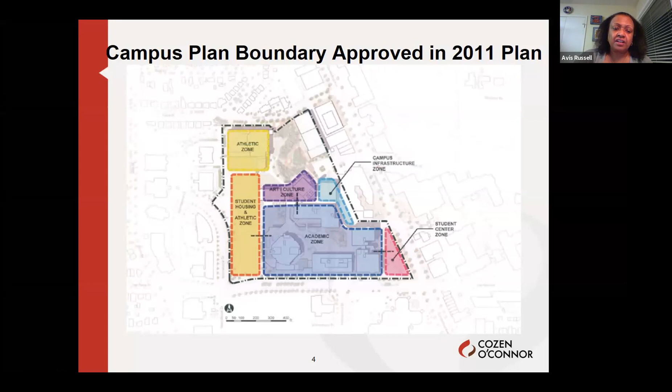So these are the campus boundaries that were approved in the 2011 plan. And this slide represents the different zones on the campus. Next slide, please.

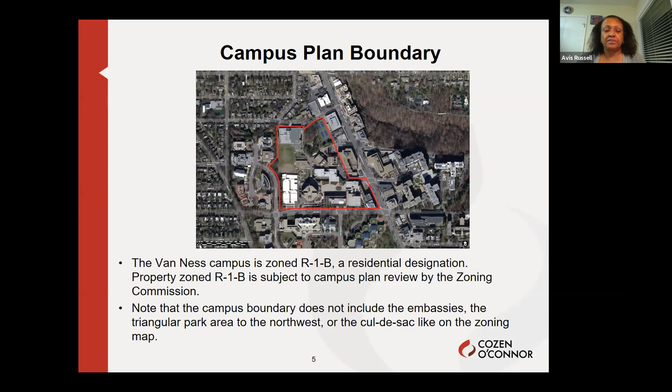This is the same configuration, but within the red area is a configuration for the university, and it is zoned R-1-B, which is a residential designation, and properties that are so zoned have to be reviewed by the Zoning Commission. Next slide, please. And this shows the other 3 sites that we occupy on Connecticut Avenue.

In yellow at the top of the slide in the square is the law school. The next configuration that's irregular in shape is the 4250, which the university recently bought. And across the street is 4225, which is the old Walgreens building, which the university leases.

These are not within the boundaries of the master plan that goes to the Zoning Commission. However, the university is conducting what we call an institutional plan that includes all of our sites, not only those on Connecticut Avenue, but the community college, the hangar where we have our aviation program, and other sites, our farm in Maryland. So we will be informing you about those sites. I know you have particular interest in what's happening on Connecticut Avenue.

And as Juanita Gray said, we are engaged in discussions with potential tenants, and we will share that information with you as soon as we can. Next slide, please.

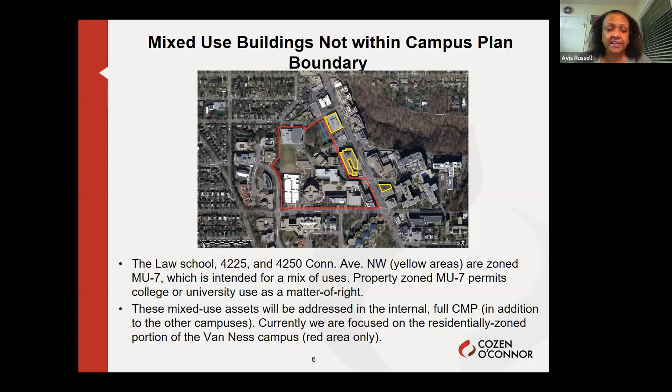And we have also had outreach with DC agencies, including the Office of Planning and DDOT. We had a recent meeting with DDOT as well, we'd met with them earlier in the process, and we met with them last week. Next slide, please. So now we're going to focus in on the campus a little bit more and let you know what changes we are making or proposing for the Van Ness campus.

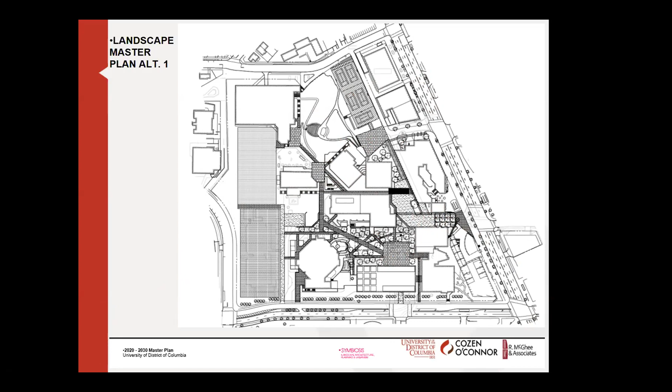So next slide, please. I'm going to briefly go over some of the slides that the landscape architect has put together, and then touch on what Sergio briefly mentioned, which is really the three main focal points of the recommendations we're going to make as part of the campus master plan, involving improvements at Windom, Veazey, and on Van Ness. This is just an overall campus master plan, or at least the recommendations by the landscape architect. I can't speak too much to these, but if we could go to the next slide, I can at least talk about the transportation improvements.

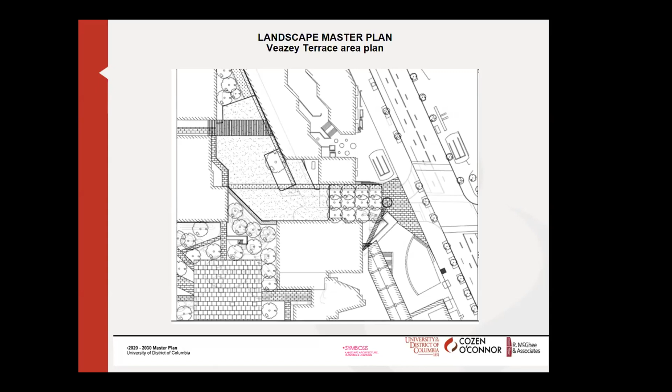Here's Veazey Terrace. This recommendation, as you might now see, is to, and this is something we're currently still exploring, close down Veazey Terrace and turn it into a plaza and an extension of the sidewalk, more of a gateway into the UDC campus. This is something we're in discussions with DDOT about, and it's a continuation of the recommendations you'll see at the other locations. It's really taking the campus that was designed at a time with a car in mind and bringing it more into current times where we're looking at pedestrian, transit, and bike access to campus.

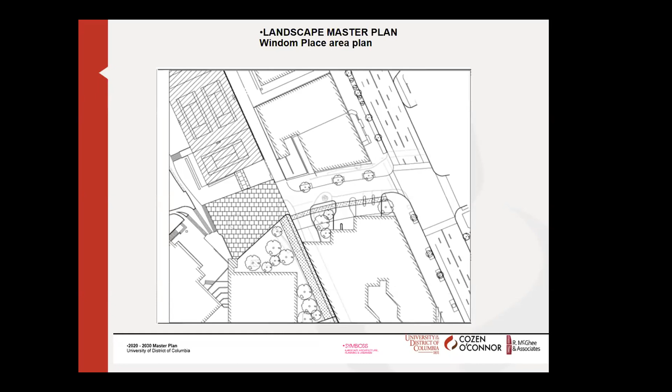Next slide please. Here we're looking at Windom Place. Again, the major move here, and this is something we're in conversations with DDOT about, exploring maybe bringing this in as part of the Connecticut Avenue improvements, is really expanding the sidewalk southwards to make it a more inviting entrance into the northern part of the campus, while also providing better pedestrian connectivity going east-west, which would also align with improvements to the intersection of Connecticut and Windom.

Next please. And then finally on Van Ness, you can see in the lighter gray, it's really taking the access point, currently at International Drive and Van Ness, and consolidating it from two driveways into a single driveway, which aligns the geometry of the intersection to be much more normal and easier to understand for pedestrians and drivers, and also reduces the number of driveways pedestrians have to cross while going east-west. This would also involve perhaps closing one of the access points into the garage and consolidating it all onto this point. It's slightly off to the left here, you can't see it, apologies for that. But that's also something we're currently exploring with DDOT.

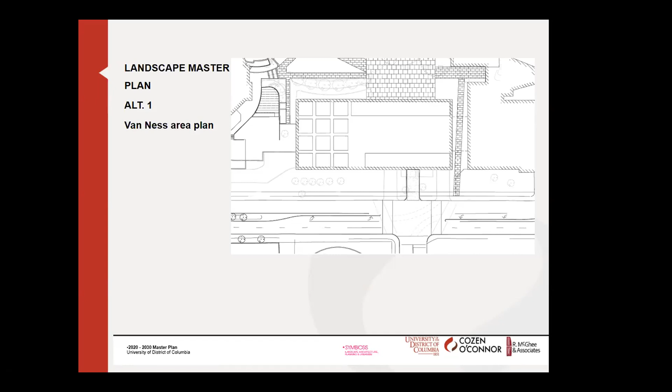Next slide please. This is just a slide that really summarizes everything we've just discussed. I'm here to answer any questions if you have any. Thank you.

Shall we hold our questions for later or jump in now? You can ask questions now. We only have, I think, one more slide, and that's to talk about what our next steps are, so questions are appropriate at this point.

All right, this is Carolyn Keebler. I have a couple of questions. David Christio represents the single member district that UDC is actually in, but I represent the SMD that's right across the street, which has each one of those intersections you just talked about in it.

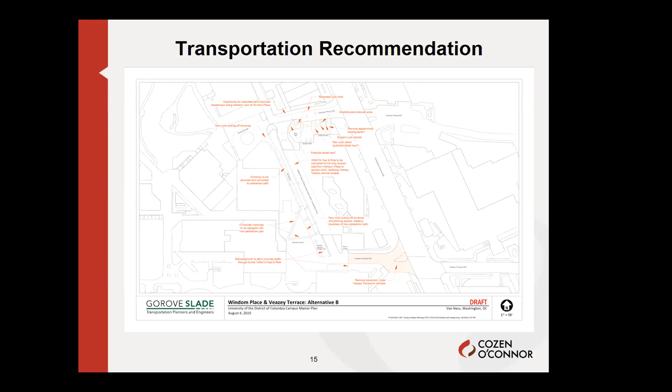In terms of operations at Veazey and Connecticut, by closing the western leg you're simplifying the intersection. It becomes a simplified T, as opposed to currently being almost a five-legged intersection. By simplifying the operations, it could give additional signal time to pedestrians while maintaining vehicular throughput. As part of the reversible lane project DDOT is doing, they'll be the ultimate deciders of how that signal is timed, but as part of our transportation review accompanying the campus master plan, we'll be making recommendations touching on safety and operations.

That's a good point—the Connecticut Avenue study has some interesting options being explored. It's good this plan is going through, and hopefully the timing is good because that study is going to happen. Right now there are at least a couple options for bike lanes, either on one side or both, and however that gets worked out will have an impact on this plan and other things up and down Connecticut Avenue. Glad to hear you're coordinating.

So WMATA hasn't been part of that discussion yet, right? No, we did not feel it appropriate to approach WMATA until we knew we had buy-in internally from our board and the president's cabinet, as well as buy-in from DDOT and whatever input you all have.

Great, thanks, that helps. Question. I have a question—yes, Mr. Hoffman. What's going to happen to the spheres sculpture? What? I'm sorry, what? The big round balls, yeah, over at the plaza by the metro station.

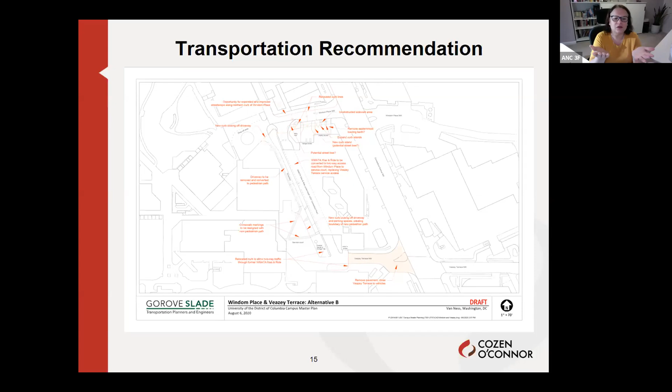David, I'll let you—Avis, this is Deepa Mehta, I have a question. In the letter of intent regarding activation of retail space, there's a provision about engaging Van Ness Main Street when there's potential for tenants. I'm wondering whether that has been undertaken yet, whether there's been outreach to Van Ness Main Street, either the board chair or executive director, since it sounds like you have potential tenants under consideration.

Juanita can answer that. We actually had a meeting with Van Ness Main Street about a month ago with KLMB to update them on what retailers we're considering—we couldn't get too specific, but gave them some ideas. Also next week, President Mason and David Franklin, our acting COO, will be presenting at their board meeting to update them on where we are with the process. So we are working with Van Ness Main Street, keeping them updated, and they are involved in the process. Thank you, Juanita, I'm glad to hear that.

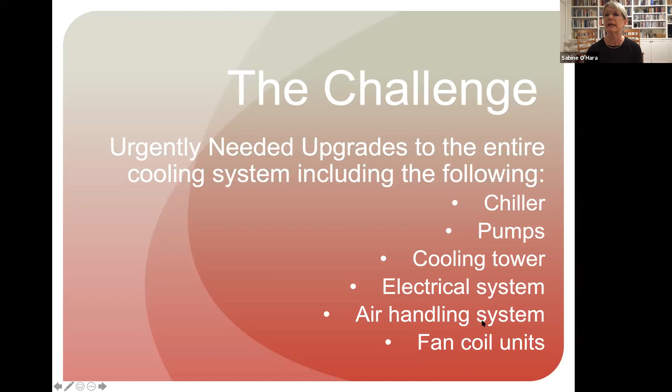So what have we done so far? We hired a professional engineering design firm to study the problem and design a solution for this HVAC system. A resolution passed on July 20th to fund the entire comprehensive upgrade and replacement of the HVAC system and to replace it with a state-of-the-art energy efficient system.

Also at that time, we passed a resolution to replace the electrical switchboard, because again, this is sort of a complex issue. You can't move a new chiller in and bring a new system online unless you know that the electricity you had to turn off to do that can be turned on again. And within a 50-year-old system, that turned out to be a challenge. I can assure you, I've learned more about HVAC systems than I ever thought I would.

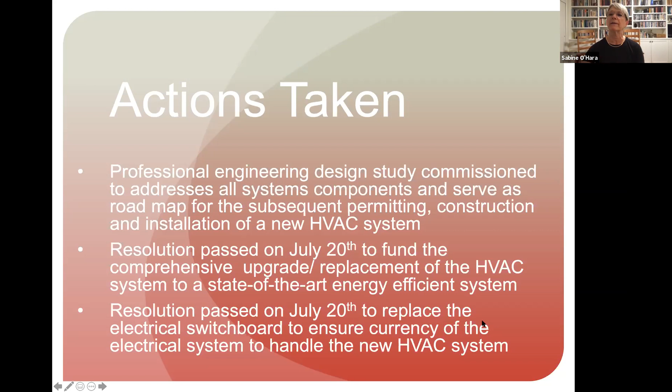So here are some of the additional actions we've taken, more shorter term actions, as I call it. We have implemented additional sound abatement measures in the form of sound blankets around the current temporary chiller to mitigate some of the noise emanating from the chiller.

This turned out to be a bit of a challenge because some of the earlier designs we had received were actually not possible to implement because they would have impeded the airflow. And so the company that makes the chiller said, absolutely not, you can't do this without actually compromising the system.

More recently, we passed a resolution at our last board meeting to turn off the chiller intermittently at night when temperatures are lower. If you came behind the building tonight, you would find it was turned off. It was also turned off yesterday.

So this is the timeline and why this is such a complex problem. The engineering firm went top to bottom through the building to see what needed to be done to correct the problem, and that in itself was a 110-day process. The study is completed, and we have a second study also completed because we didn't know the electrical switchboard also was going to pose a problem. Now we've submitted that design to DCRA and paid the fee, $12,000 and some odd dollars, so that permitting process is underway.

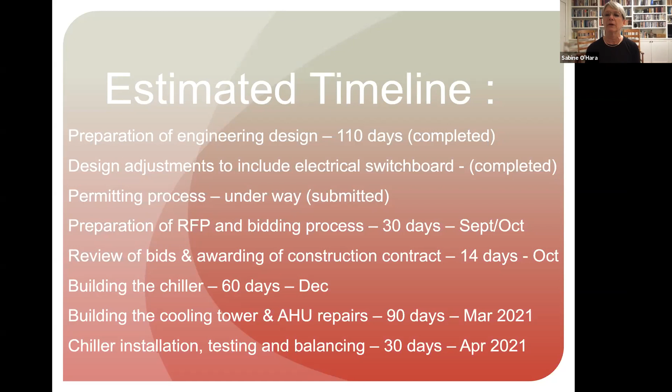The design the engineering firm did for us is now the meat of an RFP process to hire a qualified contractor to implement all these components of the project. We hope to award a contract in October so we have the necessary time. These chillers don't sit around at a hardware store, they have to be custom made, and that takes 60 days. Then it takes roughly 90 days to get the cooling tower and switchboard ready for installation of that chiller, and then we'll work with the internal systems in the building. I'm hopeful this will stay on time so we'll be ready by April to test the newly installed system for the cooling season next summer.

So that's where we are. I put my email here, and the email address of another newly elected board member, Ben Surley. Ben, I saw you on the call earlier today. Please email one or both of us.

Thank you so much, Commissioner, for your question about how we can continue to move this process forward and how we may work together to accomplish that. If you would contact us, we have drafted a letter to DCRA to help with the permitting process, because even as we hire a qualified contractor, the work will not be able to begin until we actually receive the permit. I'm a little concerned about that process, and any help you would want to offer to assist us in that permitting process, we would greatly appreciate it.

I would be remiss if I finished my presentation without saying thank you to you as commissioners, but also to our neighbors for your tolerance and for sharing your concerns with us. We appreciate that, and both Ben and I have been reaching out to our neighbors actively to be in communication. We have also written to Councilmember Cheh's office to apprise everybody of the actions we have taken to address this problem, because you are quite right to voice your concern, and we share your concern because we also have residents in the building whose units go out to the back, and they are greatly impacted too. So thank you for giving me the opportunity to provide this update, and I will stop screen sharing now and look forward to your questions and comments.